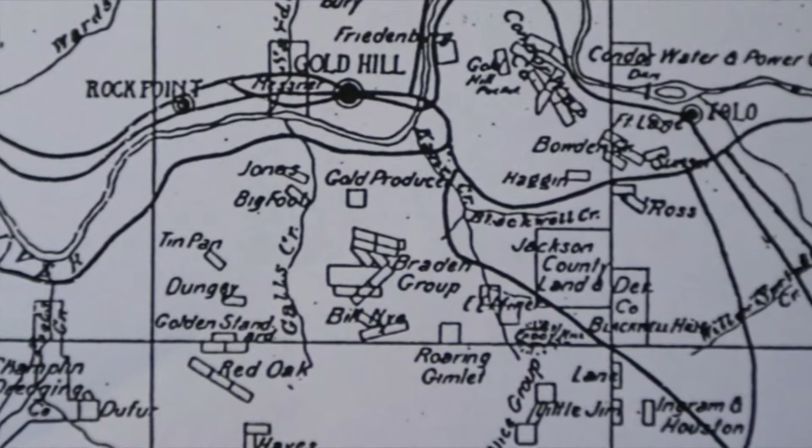Colonel Frank Ray lived in New York. He was a vice president of the American Tobacco Company. His brother, Charles Ray, also known as Dr. Ray, had been in Alaska where he was trying his hand at gold mining, apparently with not much success. As Charles was getting ready to leave Alaska, Frank communicated to him, 'Why don't you go to Medford and check on my investments there?' Frank owned the Braden mine, which was a very profitable mine near Gold Hill. Charles went down to Medford, investigated, saw the possibilities, and apparently decided to stay here and manage his brother's investments.

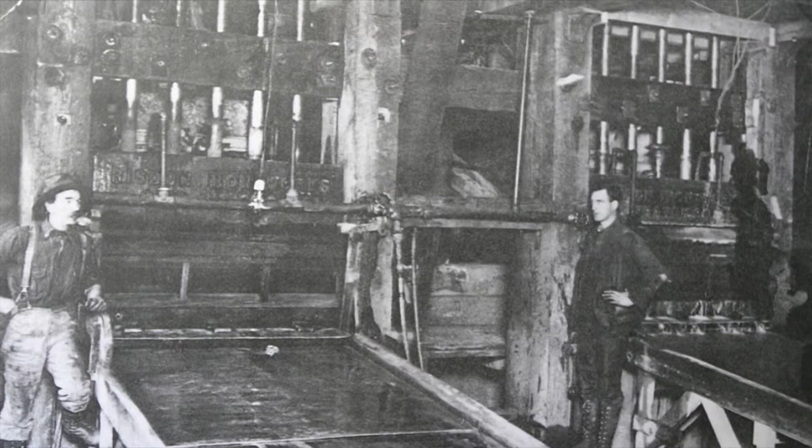Over the course of time, Charles convinced Frank that operating the Braden mine with a steam-driven power system was not as efficient as doing so with electricity. And so Frank Ray, at Charles Ray's insistence, started buying up property on both sides of the Rogue River, looking for a place to build a hydroelectric facility.

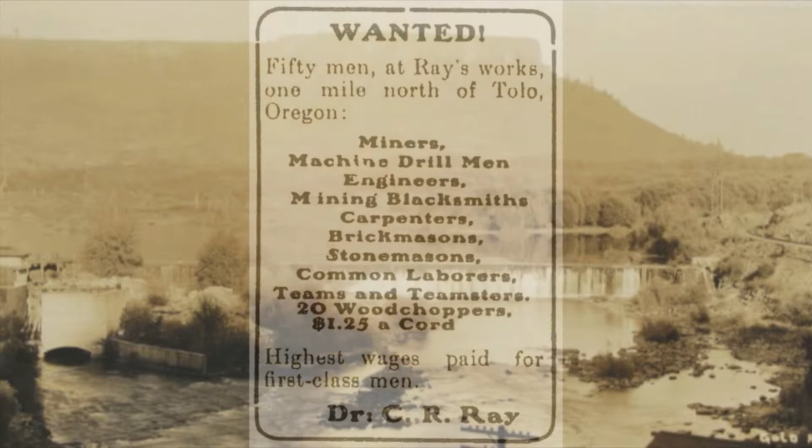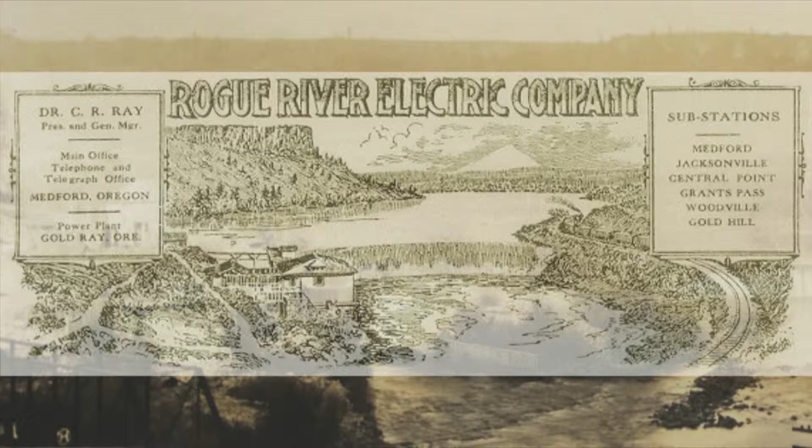They decided that a site near Tolo was the most appropriate site because of the bedrock there, and they began building a power facility with the intent of powering their mine. After they got it going, they realized that they could make more money selling electricity to the local communities than they could mining. So they sold the mine and kept the electric station.

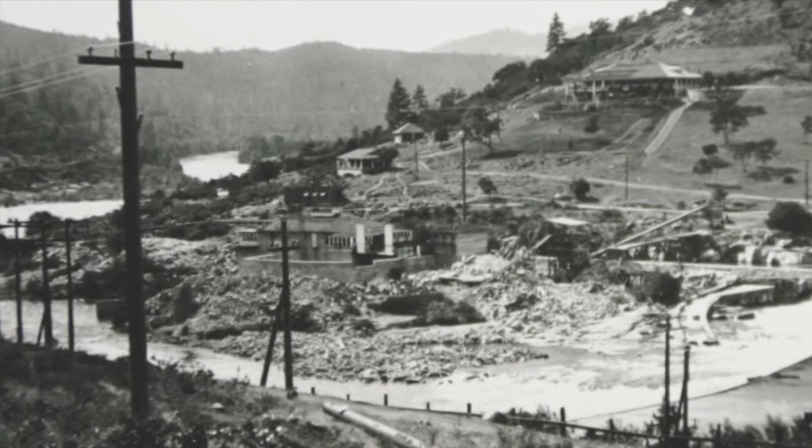There were many workers working on this project for over a year. And then after it was completed, the Rays envisioned it as something like a clubhouse where people would come out and spend the day playing cards, smoking cigars, whatever guys did then.

Up at the top of the hill is this elaborate structure that's the water tower. And all it was a tank. They pumped water up to it, held the tank, and then used water pressure to come down and serve the facility. Put a little Greek colonnade on it. It was a pretty elaborate little building for what it was.

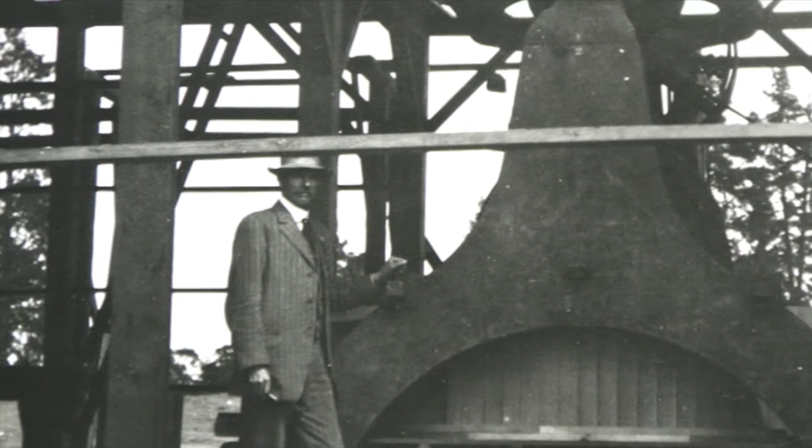This is Dr. Charles Ray, proud of his new purchase. This is a 1904 original vertical turbine at Gold Ray in the original part of the powerhouse that was built to supply power to Medford for the first time. You can compare the vertical turbine with the horizontal turbines that actually powered Gold Ray after 1905.

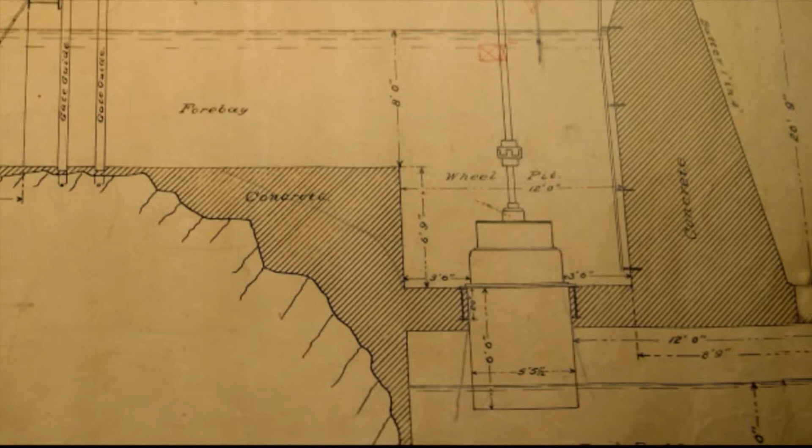We don't know exactly what the capacity of this project was. It was probably about 425 kilowatts, about half, a third of what Gold Ray would become. And they used this into late 1904 when they started generating power and sending it to Medford for the first time. And the demand was such that they immediately realized it was too small. So they began making plans to build a larger plant.

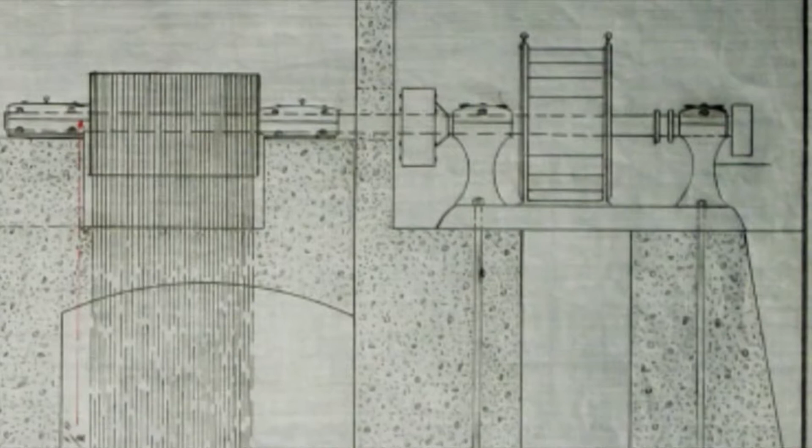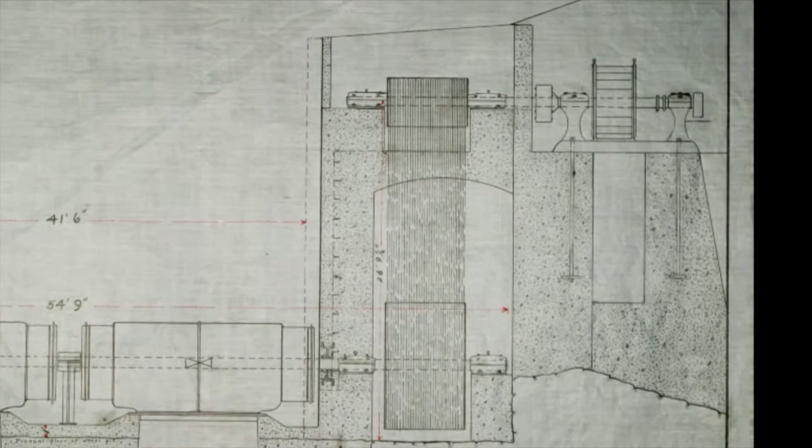In early 1905, they ordered two giant generators from the General Electric Corporation, 750 kilowatts each. They couldn't shut off the initial turbines because they still had to provide power to the city. So what they did was redesign the forebay and take what had previously been a straight shot from the headgates and expanded it into the river channel, widening it so that they could continue to send water to the original turbines while they excavated a pit for larger turbines and built an extension to the powerhouse.

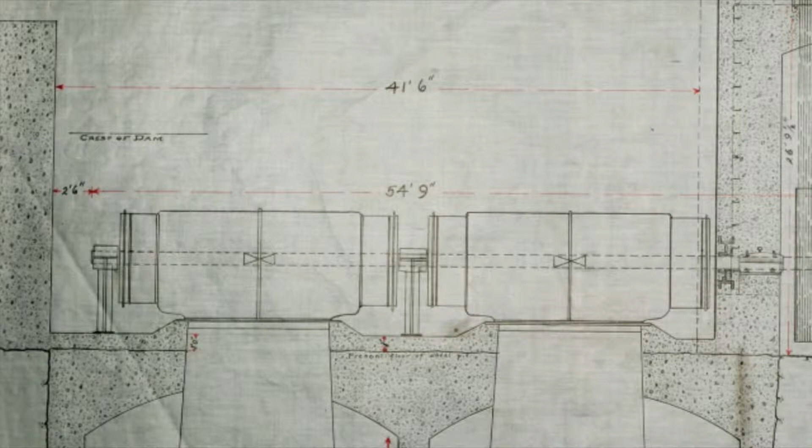This is a very, very unusual design. They put in horizontal turbines, not vertical turbines like we think of usually. These turbines didn't spin like a top, they spun like a squirrel cage. And the water would come through and spin the turbines, which would spin a drive shaft.

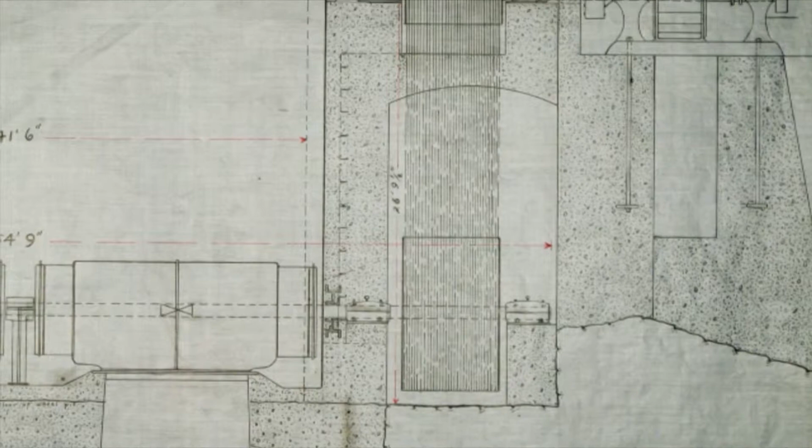Where it gets very unusual is that instead of the drive shaft being connected directly to the generator, which is what happens in most powerhouses, it was connected first to a lower pulley, buried in the bowels of the powerhouse, which was connected to an upper pulley by 1,600 feet of 1.5-inch manila rope. That upper pulley, up at the power floor level, would then spin another drive shaft, and that drive shaft would drive the 750 kilowatt generators.

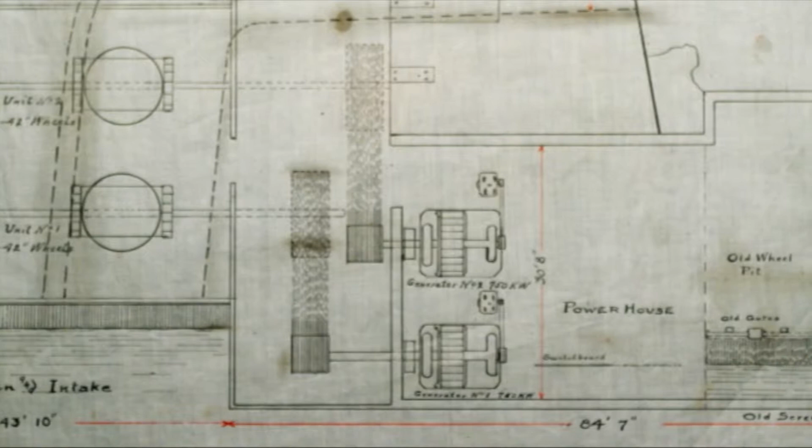You can also see over here where the old wheel pits from the original 1904 turbines had been removed. And what I like about this one is that you can also see that the Ray brothers were thinking ahead, putting into their new extended forebay space future draft tube openings for units 3 and 4. Those units never got built, but they were planning ahead when they made the forebay so wide.

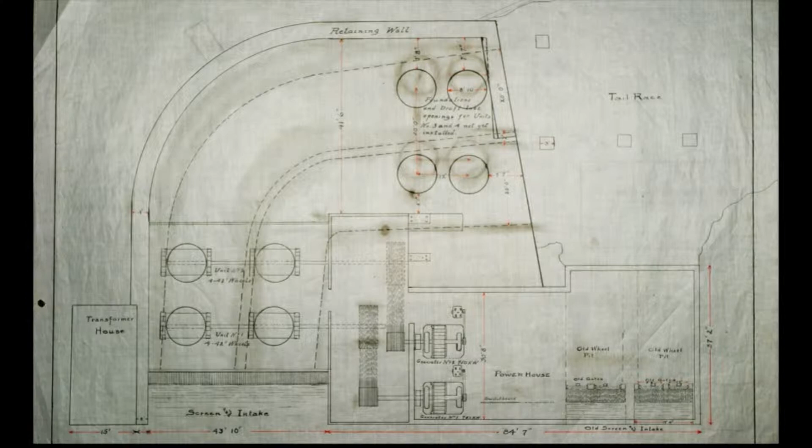Even with the expanded capacity after 1905, 1.5 megawatts, there was still a need for more power. So they brought back one of the original 1904 generators and reinstalled it into the powerhouse. It probably generated about 425 kilowatts, which would have given a total capacity to Gold Ray of just under 2 megawatts.

In the second turbine bay, in the original powerhouse, they put in a centrifugal pump capable of pumping 2,000 gallons per minute. This was part of an irrigation scheme for orchards. That didn't work out so well, and they eventually took it out.

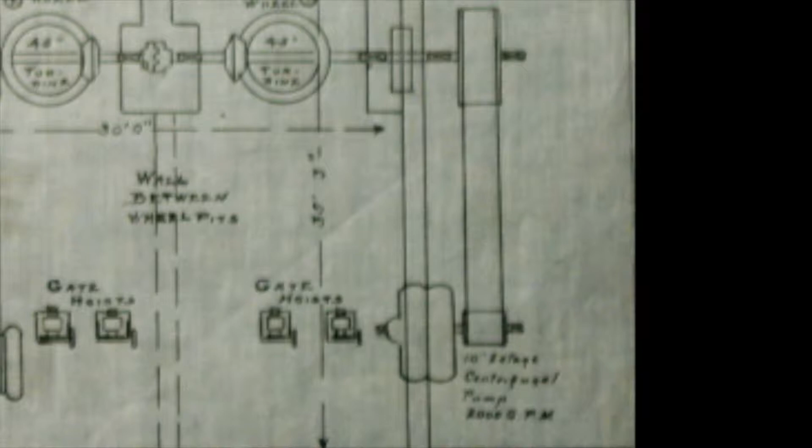One of the really interesting things about this drawing, dated 1908, right after this generator had been put in, is that it too obviously was a rope drive system.

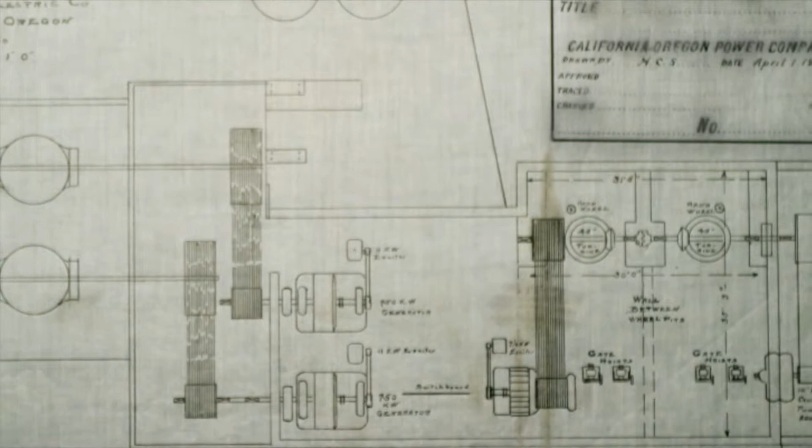The 1904 generator that was reinstalled in the powerhouse in 1908 stays in use at Gold Ray until 1921, and then Copco, who had by that time purchased this facility, moved it down to a power plant in Keno on the Klamath River. This drawing was done in 1908, and it shows you the newly expanded powerhouse with the 2 larger generation units in place.

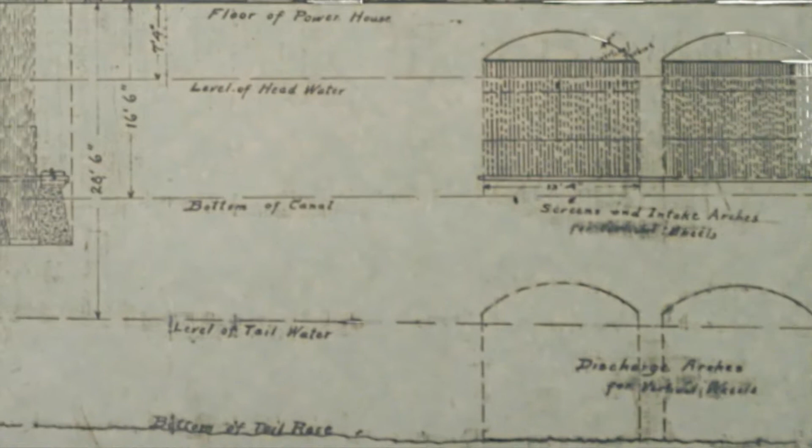The 2 rope drive systems are visible, the twin 42-inch turbines are in place, and the discharge arches and everything from the original 1904 powerhouse have essentially been closed off and abandoned.

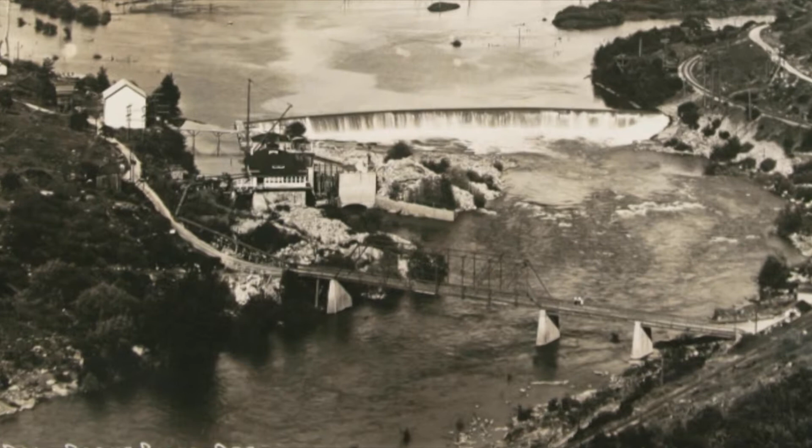When the Gold Ray project was first developed in 1904, it was an industrial facility, but it was also sort of a tourist destination, envisioned as the showplace of industry and of the future. They actually had tours out there. There was a train line that ran on the other side of the river channel, and it would stop, and people would get off.

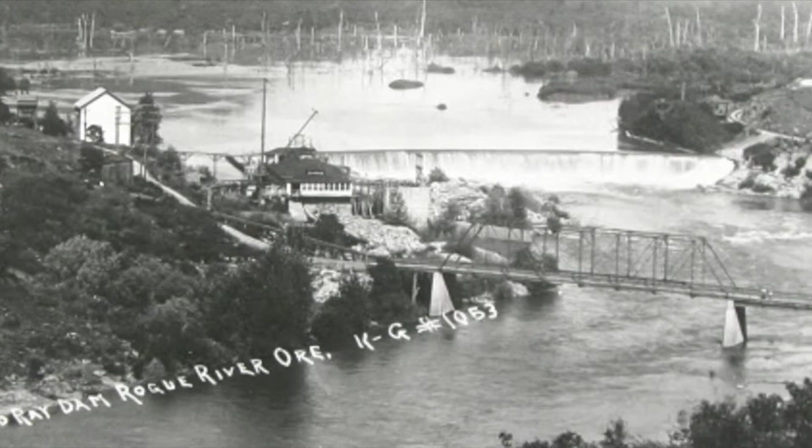They would go and fish at Gold Ray. They would come and see the timber mill and visit the dam site and the powerhouse. There was this elaborate bridge across the channel so that you didn't have to walk.

The Rays built a clubhouse, this very large 2-story building built up the slope from the powerhouse, and envisioned it as sort of being a man's place, I think, where people could come and have drinks and play cards and that sort of thing.

They built a whole series of structures to support all of these industrial and sort of almost social uses on the site. Probably the best testament to that, in addition to the clubhouse, was the little water tank, which they took the trouble of putting a colonnade in front of, turning it into a little Grecian temple.

By 1941, the Rays were long gone, and a large building, which had been built as a clubhouse, had outlived its usefulness. There just weren't that many people at Gold Ray anymore, and there certainly wasn't much of a social scene. The California-Oregon Power Company, being more businesslike, tore down that large building and built these 2 little bungalows on the same site.

Still using the fine stone wall and retaining all of those site improvements, but building buildings for probably the 1 or 2 workers that now operated the facility for them.

And that rock wall still survives, along with all of the wonderful stonework and what must have been a fountain. They got tired of the fussiness of the water tower by 1941, and they took that colonnade off and just exposed the water tower, which looks like we would expect a water tower at an industrial facility to look.

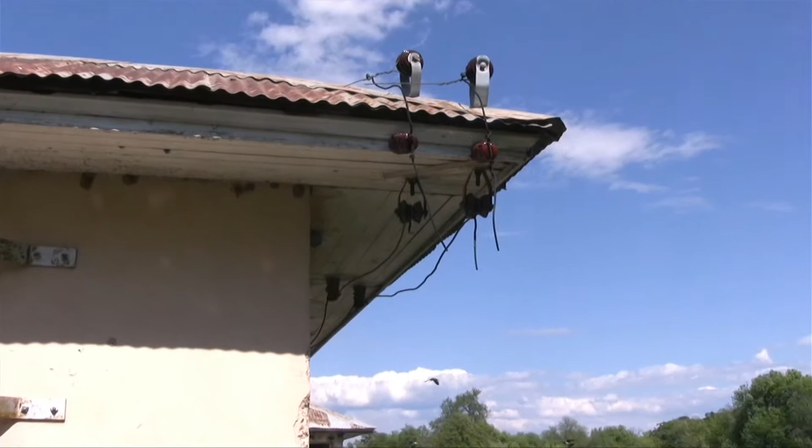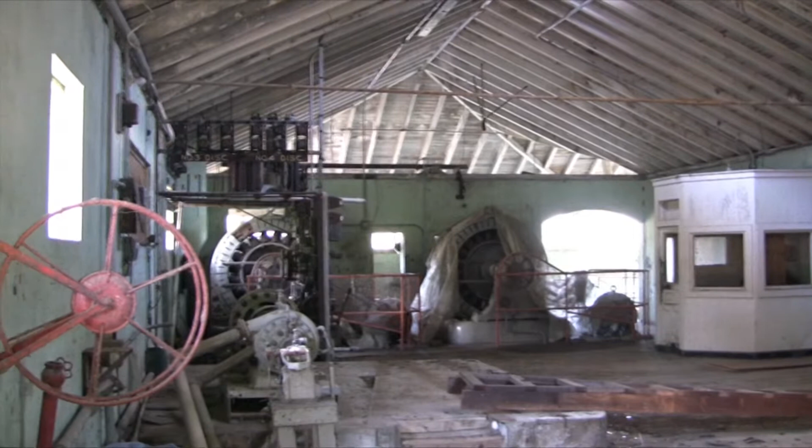The Gold-Ray powerhouse produced 1.5 megawatts of power. When it was first built, that was so much power they didn't quite know how they were going to use it all. Within 10 years, people discovered the convenience of electricity. Copco began building other power projects, one at Prospect and the largest down on the Klamath River, both significantly larger than Gold-Ray.

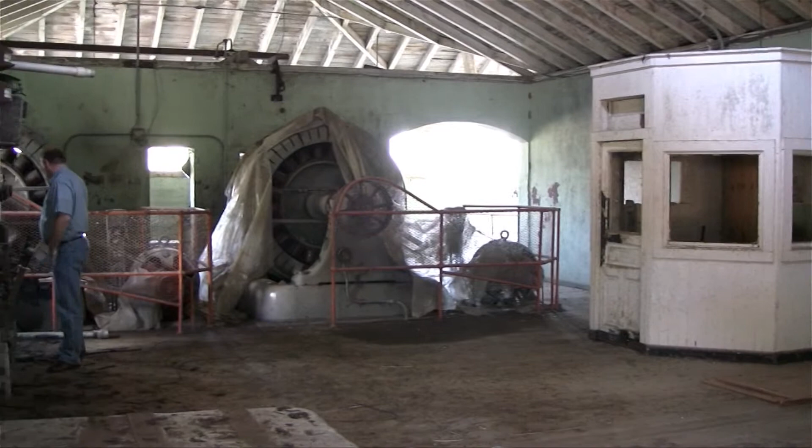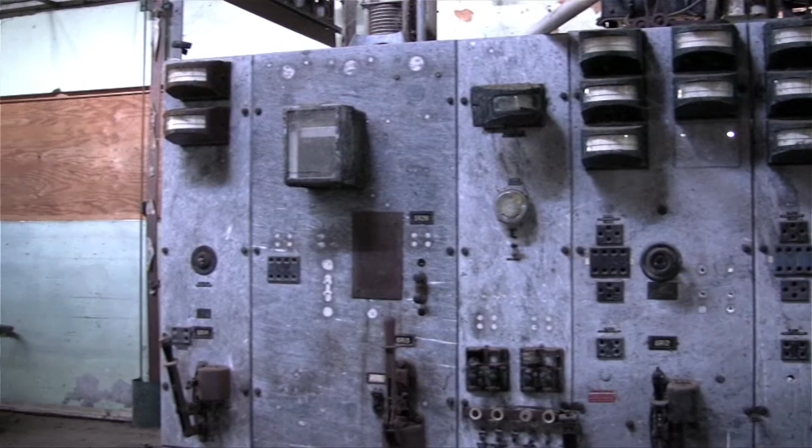And they kept this one, but it really was too small to make much changes. That's what makes it so interesting, in that essentially it's unaltered from the way it looked when it opened in 1904. It has all of its original equipment, the original twin 750 kilowatt generators, and the old switchgear is all still there. So it's really sort of a piece of time, standing on the Rogue River, just as it did when Colonel Ray and Dr. Ray opened it up in 1904.

These are the generators themselves, massive pieces of equipment for their time, probably got taken to the site on train and then trucked across the bridge with horse-drawn equipment.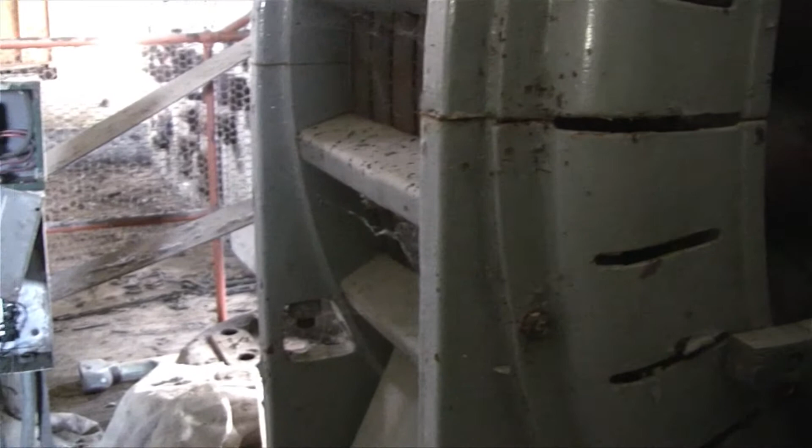This thing that looks like a small motor is actually the exciter. It's sort of a starter motor. A small amount of water would get it started. It would produce 11 kilowatts of electricity, which was enough to kickstart the large 750 kilowatt generator. And then they didn't have to put a huge drain on the turbine immediately by kickstarting that large piece of equipment.

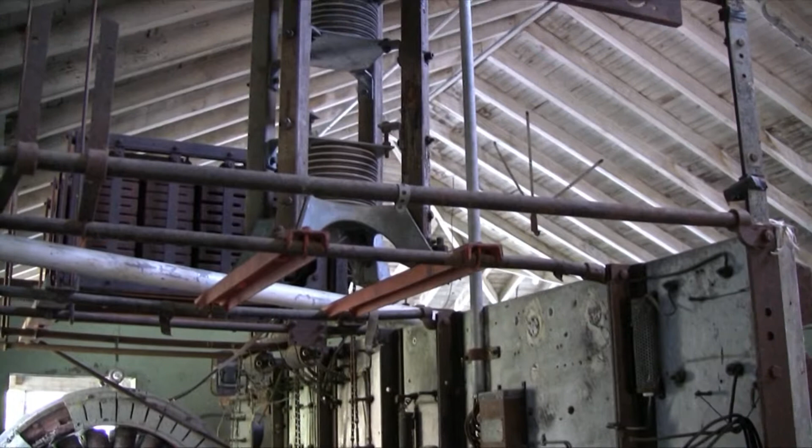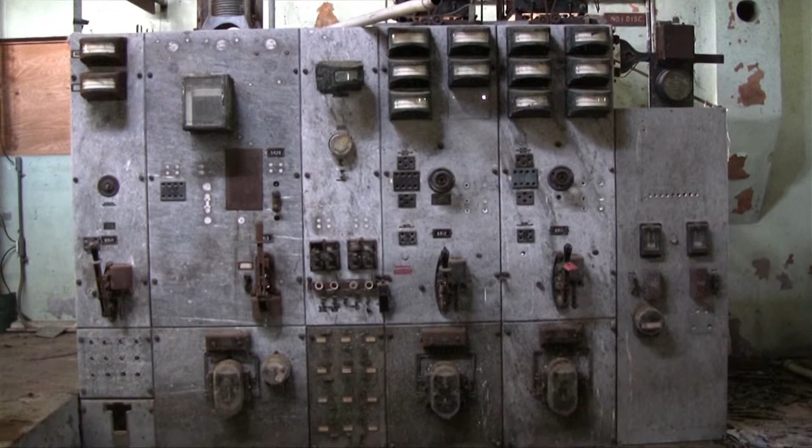This is the back of the switchboard. Kind of gives you an idea of state-of-the-art electric generation, 1904. The switchboard itself is all backed in marble. Marble doesn't conduct electricity, and so it was considered a safe material. And they would control the operation of these generation units.

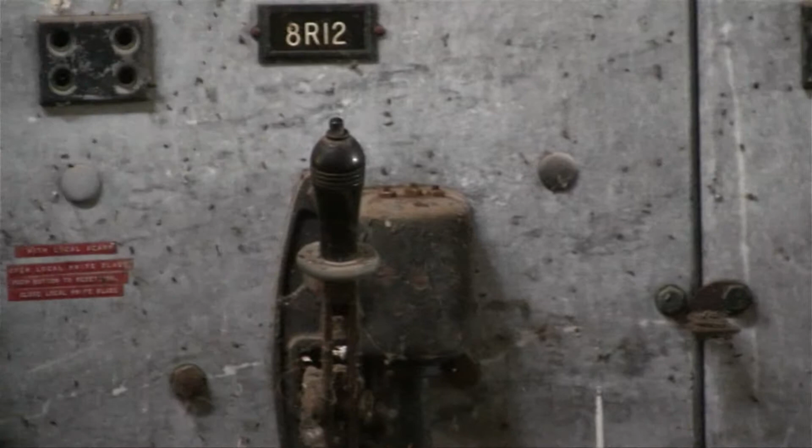Again, the interesting thing about this is that they really never upgraded it or changed it much. 1.5 megawatts is such a small amount of power, and even was a small amount of power by 1920, that this plant wasn't worth upgrading. Copco, at various times, all through the 1930s and up until the 1970s, looked at taking the old 1904 turbines out and putting in new units. And every time they did it, they decided it wasn't economical to do so. So the Gold-Ray powerhouse just kind of sat there with no modification. It was producing power up until the early 1970s.

There you can see, nothing much has changed since 1904. This is a centrifugal pump that was connected to the generation units and created the domestic water supply at the Gold-Ray project site. The motor would turn those serial pumps and send water up a pipe, up the hill to the storage tank at the top.

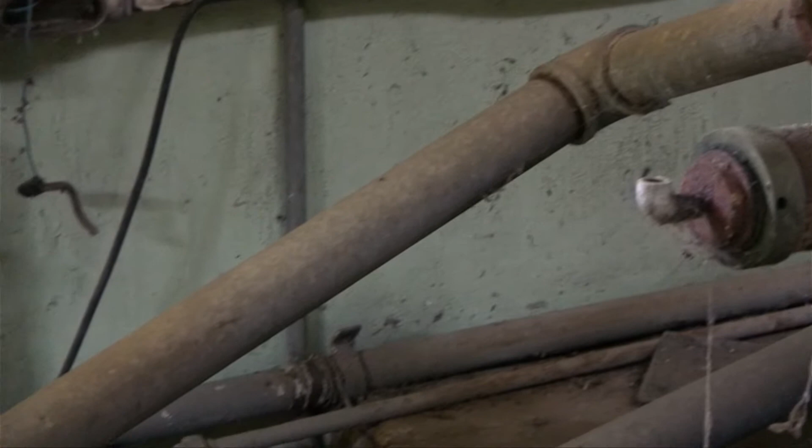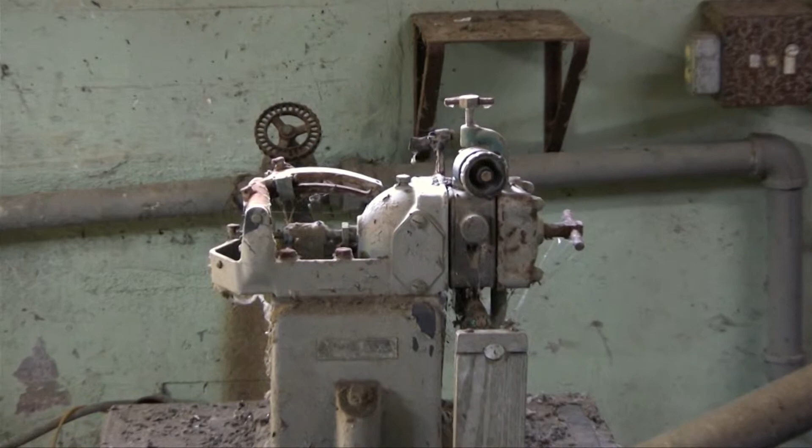This odd piece of equipment sat next to the water pump on the powerhouse floor. I spent a certain amount of time trying to figure out its function and never was able to decide what exactly it did, so its purpose is lost to the ages.

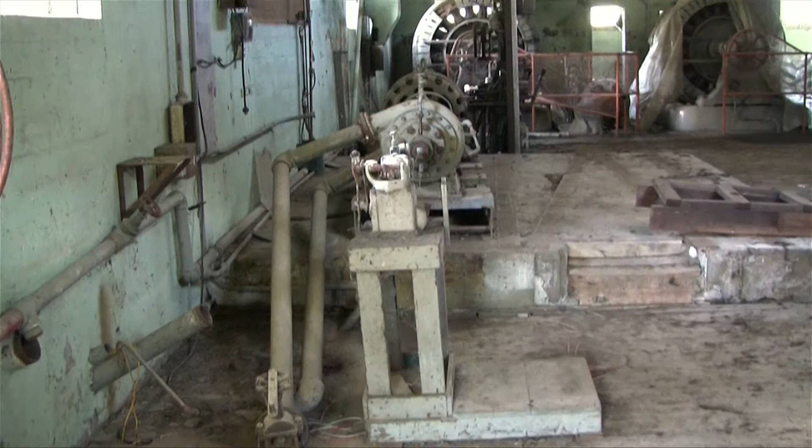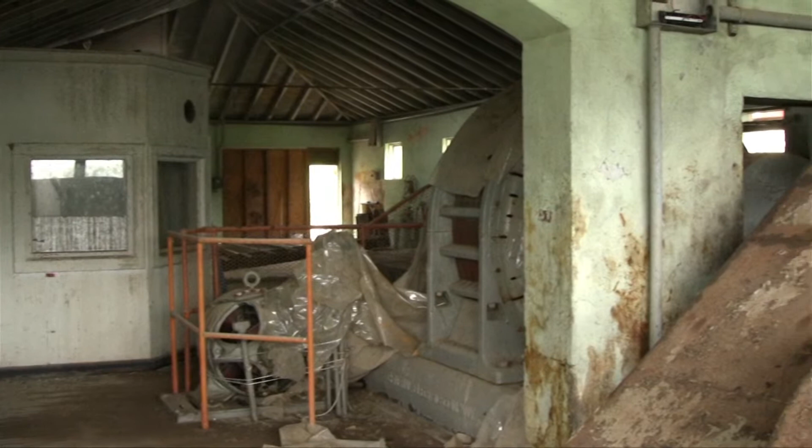This is what I guess would be called the pulley room. These are the two upper pulleys, both covered with metal protective covers so that if a rope broke, you weren't hit with 1,600 feet of rope.

This is a shaft connected to the wicket gates, which controlled the flow of water to the turbines themselves. You're now looking down below the power floor, into the interior of the powerhouse where the lower pulleys are.

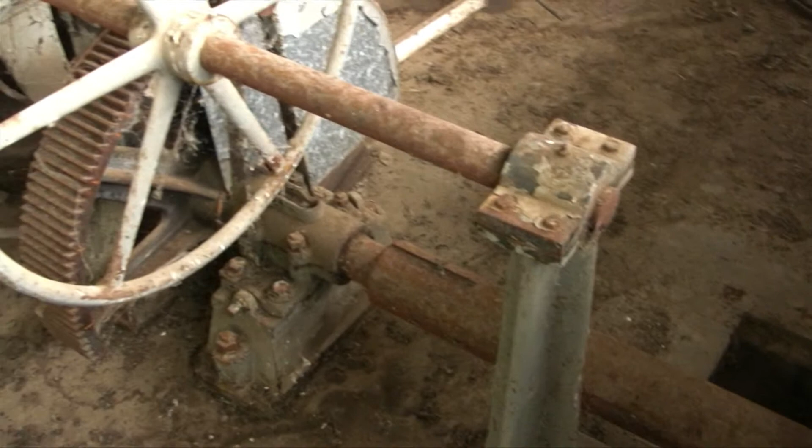Here's Unit 2's upper pulley. You can see those grooves where the rope would go.

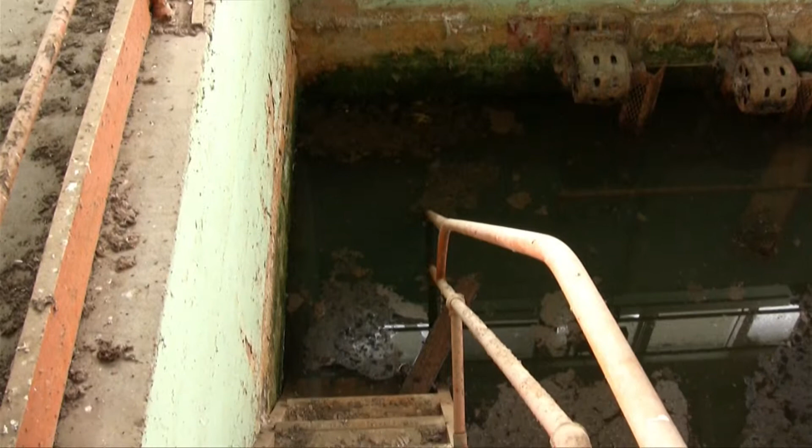This is the stairwell down to the lower pulley area. When the plant was operational, this wouldn't have been filled with water, and you would have gone down there to lubricate or maintain the lower pulleys. They had to rebraid the rope when it broke, and it was quite an art to resplice it. The last operator of the plant said working at Gold Ray was a little bit like being a sailor.

Like all early industrial facilities, the powerhouse took advantage of natural light and natural ventilation, so it has perimeter windows around much of it and a nice monitor roof that used to have openable transom windows, so the heat generated by all the equipment could have a place to escape.

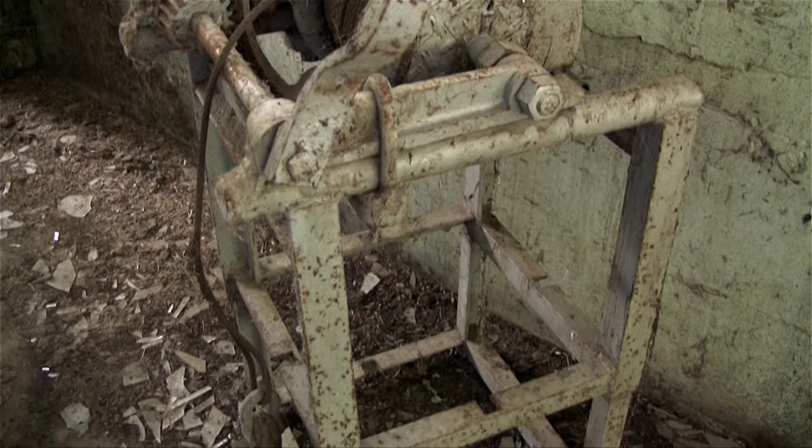Although they were powered by electricity, manpower was still pretty important, and here's a simple little winch that we don't know exactly how it was used.

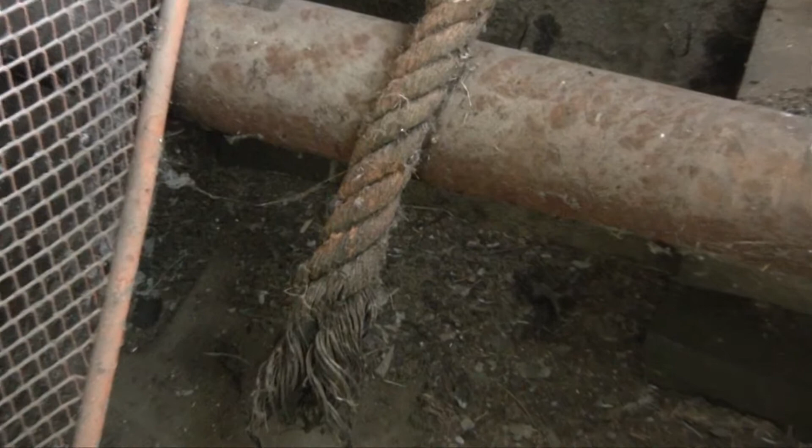The rope drive, the ropes are about 1.5 inches in diameter. There would be 20 of them in series, and they would spin as a unit, much like the fan belt on your car. Here you can see the ropes through a protective screen. You definitely wouldn't want to get your finger caught in there.

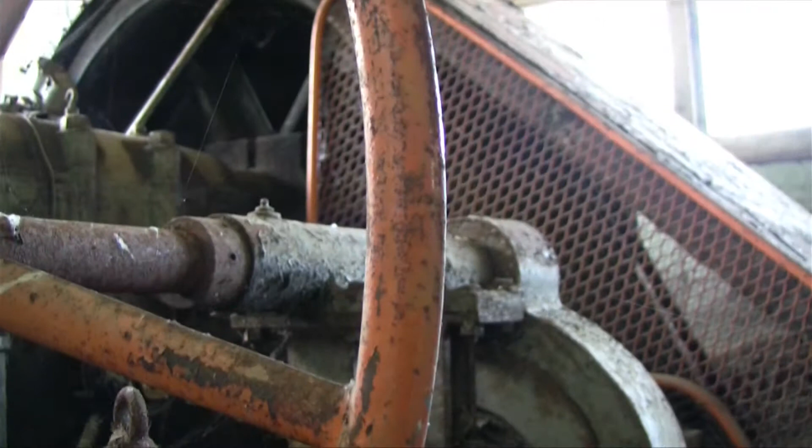In the scale of electrical generation, Gold Ray was a pretty small plant, but when it was built, it was the state of electrical technology in 1904. This was going to create more power than had ever been created in the Rogue Valley, more power than they knew they would ever be able to use. And it's a testament, I suppose, to the success of the electrification of the Rogue Valley that within a decade...

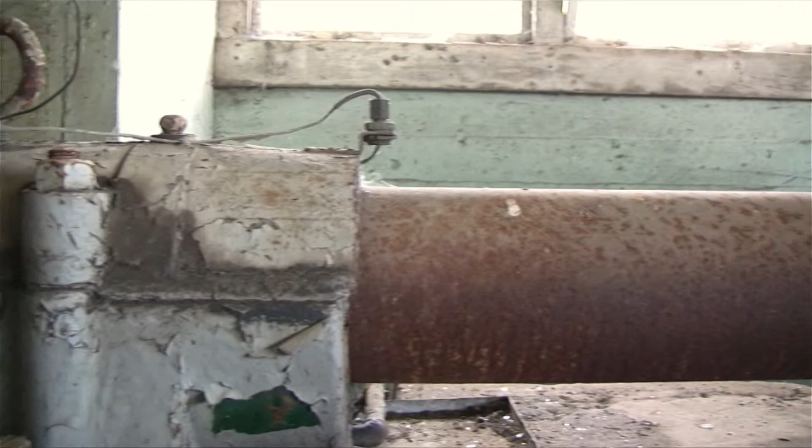this plant had been so overwhelmed by the demands upon it that they had to build plants 10 times larger up at Prospect and down on the Klamath. But until Gold Ray started producing power, Southern Oregonians didn't really realize how convenient it was going to be to have it.

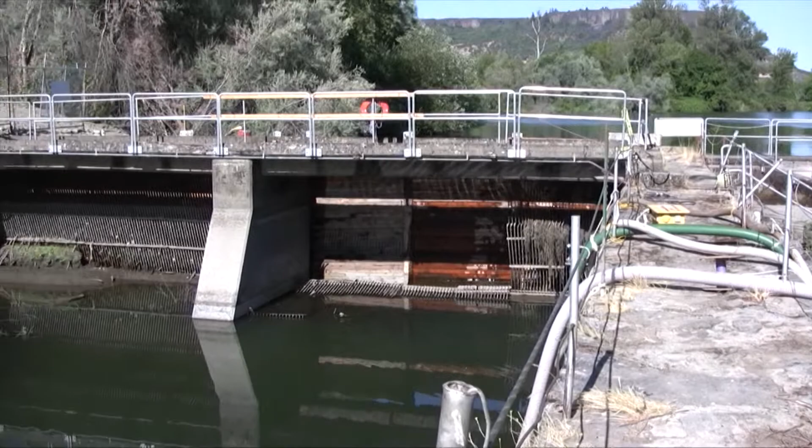This is the forebay, where the water would come off the main channel of the river, go through a head gate, and these are the head gates at the head of the forebay. These metal screens are called trash racks, and they're exactly what you think they are. They keep trash, usually logs, from coming into the forebay and getting stuck in the turbines, which of course would be a big problem.

This is the extension of the forebay. When they modified the Gold Ray powerhouse in 1905 to accommodate the larger turbines, they had to widen the forebay.

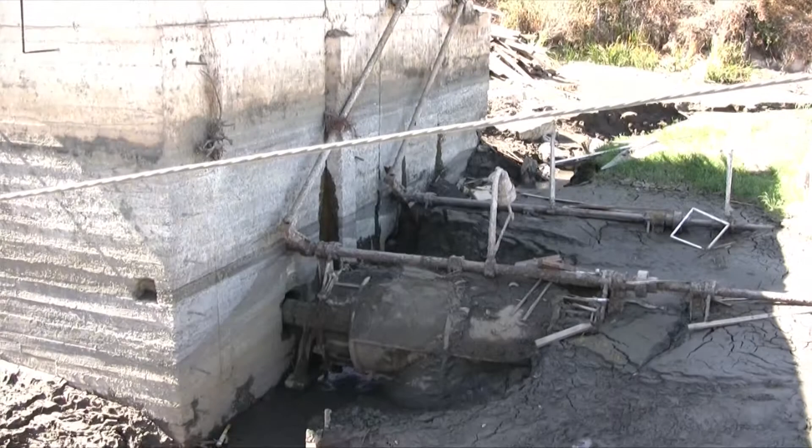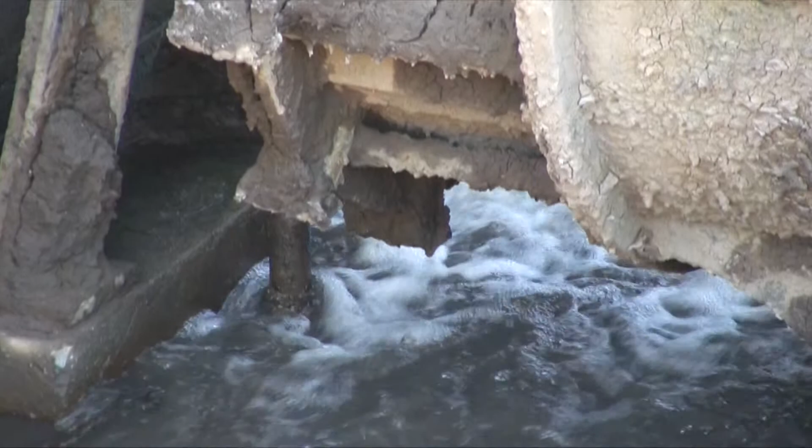These are the 1905 turbines, 42 inches in diameter. There are actually 4 of them, 2 to a unit. The wicket gates control the flow of water into the turbine.

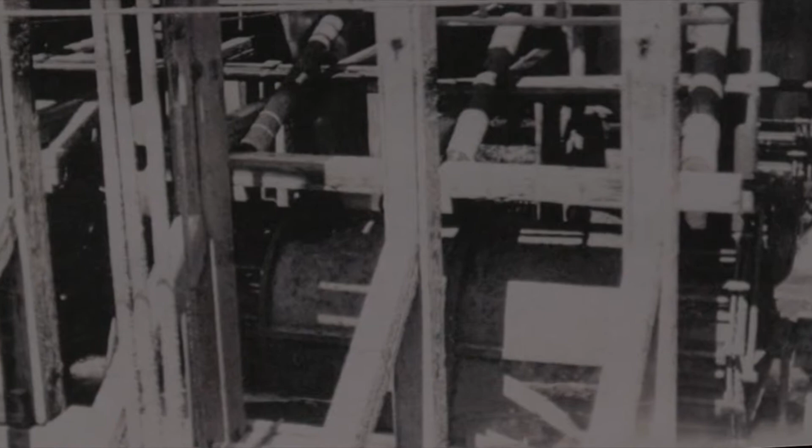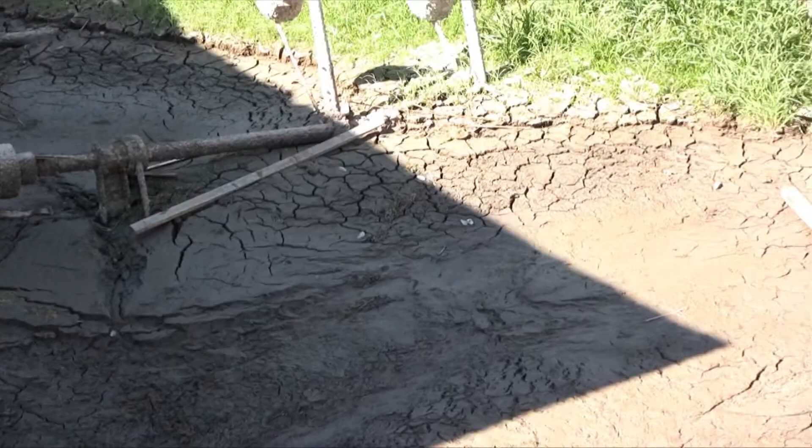Here are the turbines being installed. The bar across the top of the turbines is the wicket gate control, and what it does is open and close the water flow to the turbines. Those concrete casks are counterweights so that an operator doesn't have to fight the entire force of the Rogue River when trying to open and close water flow into the turbines.

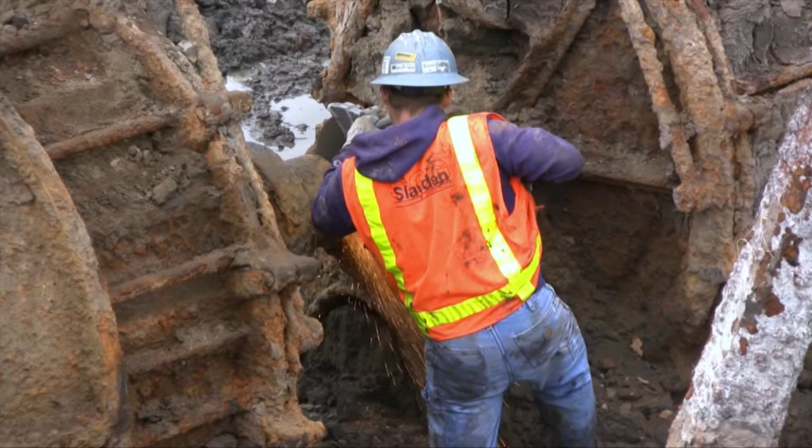One of the interesting things about Gold Ray is because it was so old, and because some of the documentation didn't come until late into the process, we didn't realize there were actually 4 turbines underneath. When we started to excavate and remove the silt that accumulated over the last 40 years, we exposed the first turbine, and we also exposed the weights for the wicket gate control. They kept going off into space, and nobody really knew why, until we realized there was actually another turbine connected, and that there were 4 turbines, not 2.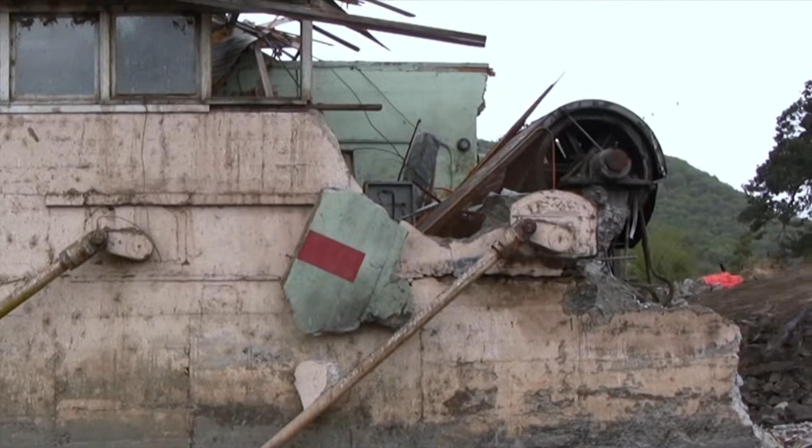By 2010, Gold Ray was really a dream of another time. It had started out in 1904 as an exciting new world, the promise of electricity, the promise of industrialization and growth in the valley, and people were glad to see it built and excited to see it operate.

Gold Ray was completed in 1904, and it did its job. It brought the valley into the modern era, it brought electricity to the bulk of the valley, it brought industry, and it brought excitement. It was bypassed by other larger hydroelectric facilities within 10 years of its construction, and for the last 80, 90 years it sat on the Rogue and was sort of a relic of the past.

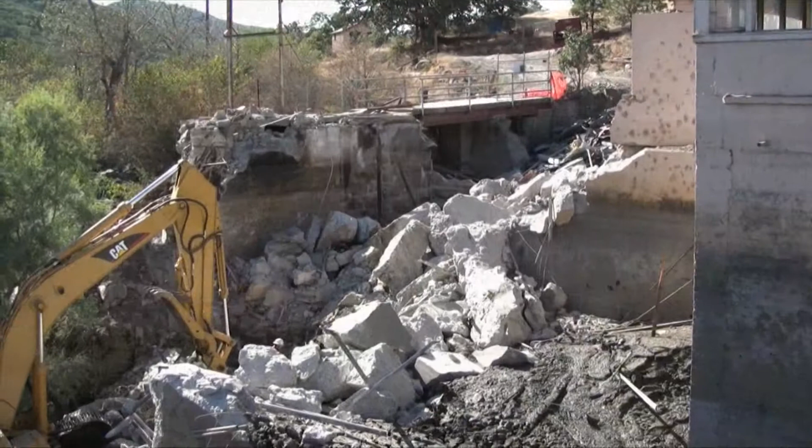It's too bad that Gold Ray had to go completely, but time marches on, and we learned a lot about Gold Ray by taking it down, probably more than we ever would have known had it just continued to stand there.

I hope you've enjoyed watching this video, and I hope the next time you drive through Gold Hill along the Rogue River, you'll look at that wide spot filled with granite and remember what used to be there.